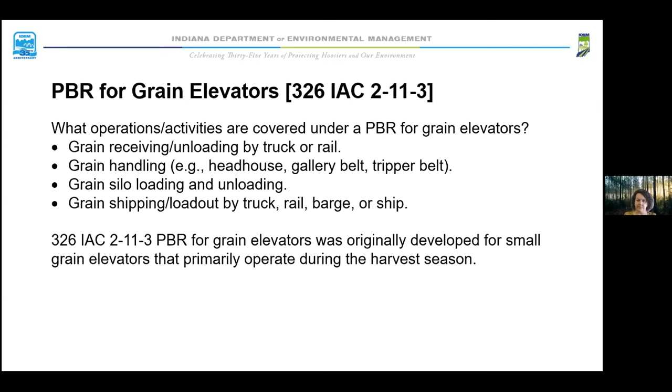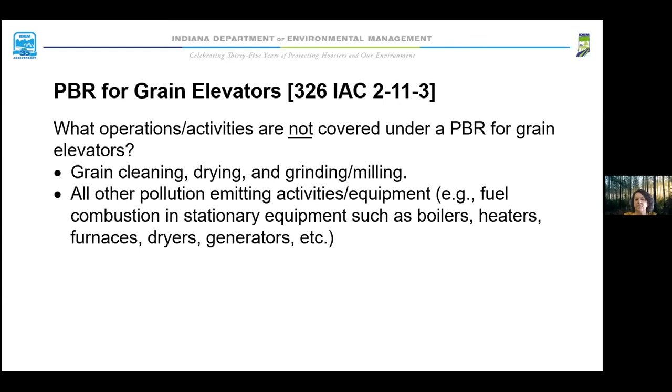What operations are not covered by a permit by rule for a grain elevator? If you're doing any cleaning, drying, grinding, or milling, you can't operate under a permit by rule for a grain elevator because those aren't covered. There are other pollution emitting activities and equipment that you could have on your source that would not be covered—potentially boilers, heaters, furnaces, dryers, generators, backup generators. Those activities are not covered under a permit by rule grain elevator. So with any of these activities on your source, you would not be able to operate under a permit by rule for a grain elevator.

If you do operate under a permit by rule for a grain elevator, there are some requirements. You have to operate and maintain your equipment properly, follow generally accepted work practices, don't discharge air pollutants so as to create a public nuisance, comply with any applicable federal, state, or local requirements, and upon request of IDEM, you need to be able to provide your grain throughputs for the previous 12 months in order to demonstrate compliance.

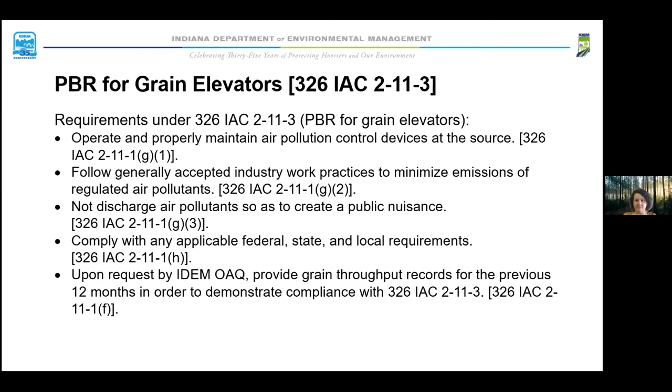Some additional things about a permit by rule grain elevator: new sources are not required to obtain a construction permit prior to operating. So if you decide that you want to build a grain elevator that will comply with the permit by rule for grain elevators, you just do it. You actually don't need authorization or an operating sheet from us in order to operate your permit by rule grain elevator.

But we do recommend that you go ahead and submit an application and get that sheet. It's going to give you the confidence and comfort that we do agree with you, and if an inspector stops by, you'll be able to say, here it is, we did apply, we do have it, and the air permitting branch has agreed with us.

With a permit by rule grain elevator operating source, you can add, modify, or replace equipment or operations without informing us, provided that the grain elevator still qualifies for a 326 IAC 2-11-3 permit by rule, or it would still be a simple grain elevator.

It does not have to be renewed, and there are no operating fees to operate under a 326 IAC 2-11-3 permit by rule for a grain elevator.

If you don't feel that you can comply with those constraints, there are some additional options. There's a general permit by rule, as we mentioned earlier, a registration, a SSOA for grain elevators, MSOP, FESOP, and Title V options.

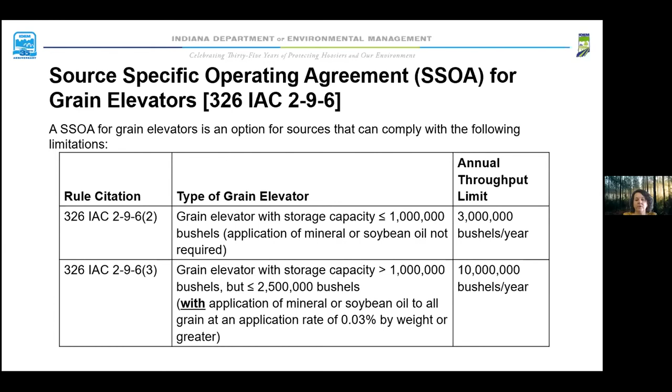Okay, so now we're at our SSOA for a grain elevator, and that can be found in the regulations at 326 IAC 2-9-6. There are two options under this SSOA. The first option is a grain elevator with storage capacity less than 1 million bushels, where you do not apply mineral or soybean oil, with an annual throughput limit of 3 million bushels a year. The second option is a grain elevator with storage capacity greater than 1 million bushels but less than 2.5 million bushels. You do need to apply mineral or soybean oil to grain at an application rate of 0.03% by weight or greater.

Your annual throughput limit is 10 million bushels a year. Again, it's not very clear in our rules what is covered, but we can go back and look historically at the rulemaking itself to determine what would be covered under a SSOA for grain elevators. The operations and activities are a little broader than what you'll find under the permit by rule for a grain elevator. So you'll have grain receiving, unloading, grain handling, grain storage, grain cleaning, also grain drying, and grain loading ship out.

For grain drying, though, please note that the only thing that's covered are the particulate emissions associated with moving the grain into the dryer. The actual emissions from fuel combustion are not covered under the SSOA, but we'll come around here in a minute and talk about how we can cover those.

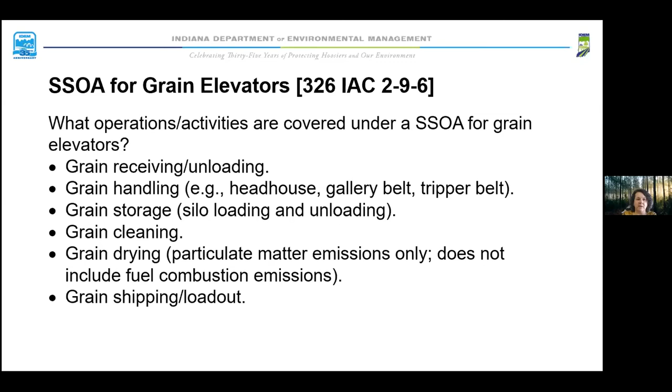So a source can apply for up to 4 different types of SSOAs, provided that the source-wide total allowable emissions, or PTE, of each regulated pollutant doesn't exceed the major source thresholds for Part 70 when aggregated. Typically, that's 100 tons per year over a 12 consecutive month period. Additional SSOAs can be required for additional units at your source.

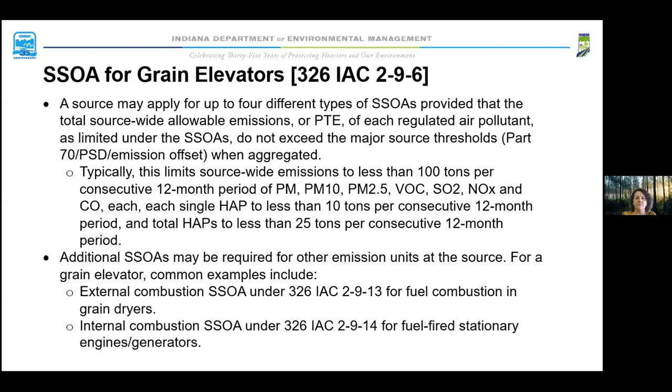Going back to that fuel combustion that is not covered under the grain elevator, you can get an external combustion SSOA, and that would cover the emissions from your fuel combustion. If you have internal combustion, stationary backup generators, those could be handled and covered under an internal combustion SSOA. So we would issue one SSOA with 3 sub-SSOAs within it.

What additional information or emission units can be included in your SSOA? Miscellaneous small equipment with combined PTE under the exemption thresholds can also be included in a SSOA. You can find those exemption levels at 326 IAC 2-1.1-3(e)(1). The exemption thresholds include 5 tons a year of PM, PM10, or PM2.5, 10 tons a year of SO2, NOx, VOC, and 25 tons a year of CO, and then a ton a year for a single HAP or 2.5 tons for a combination of HAPs.

Some examples of items that fall under this exemption: small combustion units, small boilers, small heaters, small furnaces, and small stationary generators and emergency generators can be tucked under this exempt level as part of your grain elevator SSOA.

The requirements to operate under a SSOA: maintain records of the type and amount of grain received and shipped on an annual basis. If you do opt for the second option, which requires mineral or soybean oil application, you'll need to maintain records of which type of oil is used, the application rate, and show your purchase orders. You will have an annual notification stating that your source is still in operation and in compliance with the SSOA terms and conditions, and you will have to comply with all applicable federal, state, and local requirements.

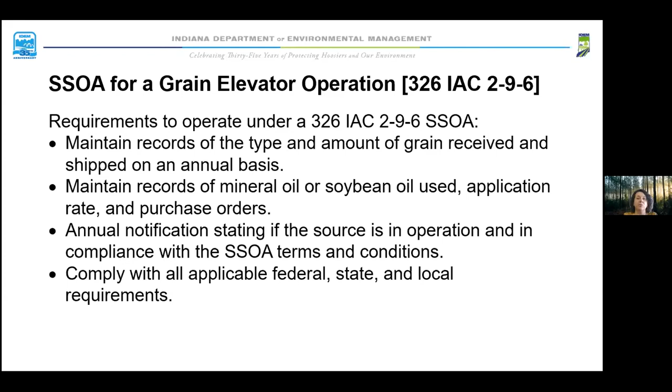So if you're a new source applying for SSOA, you will have to wait till the SSOA is issued before you commence construction. A SSOA for a grain elevator is considered an NSR SSOA, so a 30-day public notice period is required. So after putting the application together, it would have to go on public notice for 30 days, and at the end of the 30 days, we would then be able to issue it to you.

You can add, modify, or replace equipment associated with your grain elevator under the SSOA, provided that you still comply with what you are allowed to have on that CSOA. And you do not need an administrative amendment to add, modify, or replace exempt units.

There are some permitting fees associated with a SSOA, and they are $5,556 for the NSR SSOA, which is a grain elevator. If you have an NSPS or NESHAP review, and that review determines that an NSPS or NESHAP is applicable to your source, there is a $793 fee. NSPS and NESHAPs are what we call our federal rules.

You may have NSPS DD. That would be an applicable NSPS. NESHAPs typically go along with your generators. There's 4I, 4J, and under the NESHAPs 4Z. If any of those are applicable to your source, there would be a fee for that. And a SSOA does not require a renewal.

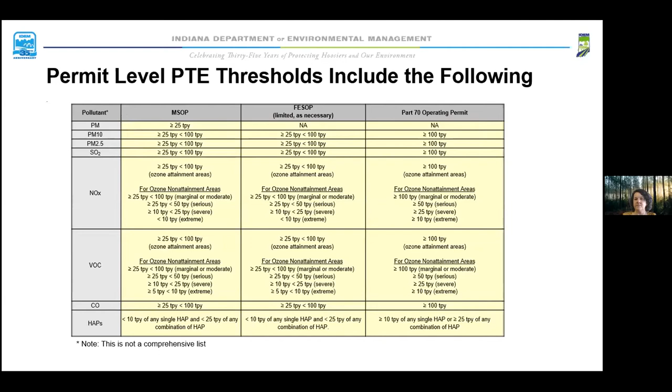The permit level thresholds for an MSOP, FESOP, and Title V are in this table. Note at the bottom it says this is not a comprehensive list of the pollutants. The additional pollutants tend to be things like hydrogen sulfide, lead, pollutants that really aren't going to affect you. We've included this table just for reference, but we are going to go down and talk about some of the limitations in a few slides.

So the first thing you would need to do if you want to look at one of these options is calculate your source-wide potential to emit. EPA has some guidance out there. It's been out for several decades.

For grain handling operations at a country grain elevator that primarily operates during the harvest season and receives 50% of its grain from farmers in the immediate vicinity during the harvest season, you can determine your PTE by looking at your past 5 years of grain throughput, multiplying it by 1.2, and using those as your throughputs to calculate what your potential to emit is.

I know we have a few consultants in the audience, so I want to point out we typically do use AP42, and it is a factor that you multiply the grain throughput by the number of trips through your headhouse. We typically look at moving from unloading into a silo as 1 trip. If you have cleaning and grain drying, you're going to have 2 or 3 trips total.

Note that the PTE from fuel combustion at your grain dryer is not based on your actual past usage. It is based on max rated capacity, 24 hours a day, 365 days a year. I do realize that's not feasible really for anybody, but that is the federal rules, it is our state rules, and that is how the PTE would have to be calculated.

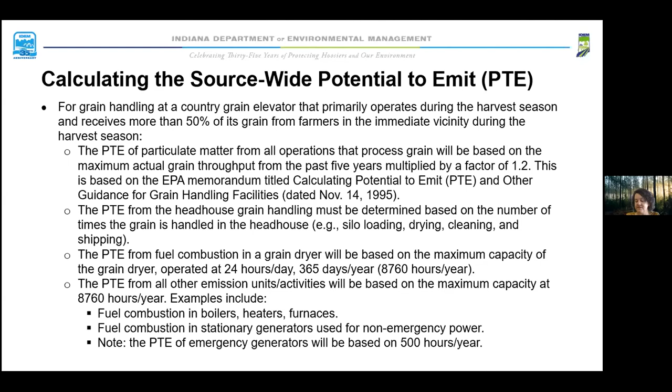So if you're not a country grain elevator and you don't have more than 50% coming from off your location, that would be all other grain elevators and grain terminals. You're going to have to calculate the potential to emit of all your emission units based on a max rated capacity at 8760 hours a year.

Process bottlenecks can be taken into account when determining your PTE, although you do need to let us know what the individual max ratings are and where the bottleneck is so we can make that clear in the calculations of permits. Again, the PTE is not based on past actuals or actual hours of operation for these types of facilities. Again, AP42 emission factors are typically used.

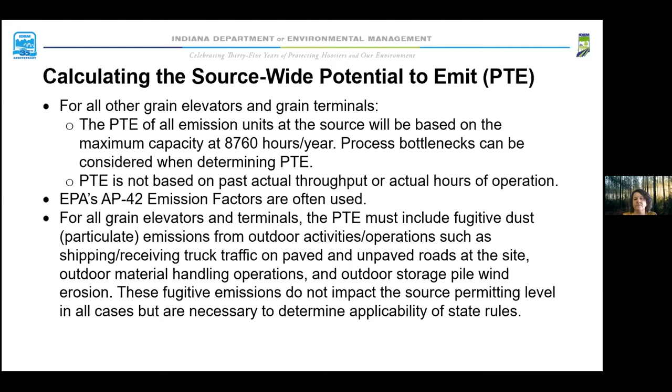For grain elevators and terminals, the PTE from fugitive dust must be included, and some of those activities would be truck traffic on your paved or unpaved roads, outdoor material handling, storage piles. They may not impact your permit level, but they are always necessary to determine state rule applicability.

So, other permitting approvals after you've determined your PTE: an MSOP, minor source operating permit, and this is the one we're going to focus a little bit more on. Your unrestricted, which is your unlimited, uncontrolled PTE, is below the Part 70 major source threshold. Again, typically that's 100 tons a year.

It generally has less record keeping than a Part 70 or FESOP. It does require a 30-day public notice and comment period. There's an annual $200 fee, and annual notification stating whether the source is in operation and in compliance with the terms and conditions in the permit. So that's at a minimum, that's going to be your record keeping.

If your uncontrolled unlimited is above 100, you're considered a Part 70 source. Again, that's a 30-day public notice period and then a 45-day EPA review period.

Annual fees are $2,381 as a base fee plus an additional $52.38 for each ton of actual pollutants during the year. And you will have annual compliance certification that addresses the source's compliance status with permit terms and conditions.

If you're above 100 tons per year without limitations, there is an option to be a FESOP instead of a Part 70 operating permit, and that would require that you take limits to keep your actual emissions below 100.

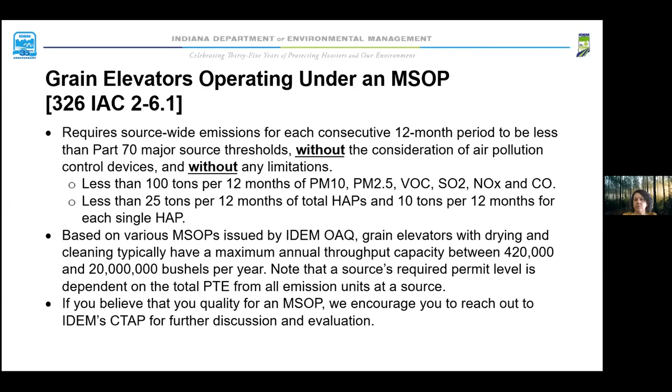Based on the various MSOPs that we have issued with drying and cleaning, we've seen a maximum annual throughput capacity between 420,000 bushels and 20 million bushels. So that kind of gives you a range of your throughput capacities that would qualify for an MSOP. Note that the source's required permit level is dependent on all the emission units at your source, so 420,000 might not work for you and 20 million may not work for you either, but somewhere in that range. If you believe you qualify for an MSOP, reach out to IDEM's CTAP or reach out directly to my office and we will help work with you on that.

So if you do get an MSOP, what are the typical parts of an MSOP for a grain elevator permit? You're going to have Section A, and that's a source summary. That's going to talk about who you are, where you are, your name, your location, what's your county attainment status. It's also going to list all the emission units located at your source.

Section B are general conditions applicable to all MSOPs. This is going to tell you when you need to apply for a renewal, kind of general information like that. Section C is source operating conditions. It may contain your fugitive dust emission requirements—don't allow dust to go over the fence line. So those are operational conditions that you're going to find in Section C.

Section D is emission unit operation conditions, and it's the requirements under our rules that are specific to the emission units at your source. Section E is federal requirements, and the last section are your reporting forms.

So I want to focus more on Section D, which are your potential emission unit operation conditions, and it's broken down into subsections. The first one is going to be emission limitations and standards. All grain elevators will most likely have a particulate limitation in them. The most common is 326 IAC 6-3-2, and this is a process weight calculation. We simply use your process weight, one of two equations that are in the rule, and we come up with the pound per hour, and that is your limitation.

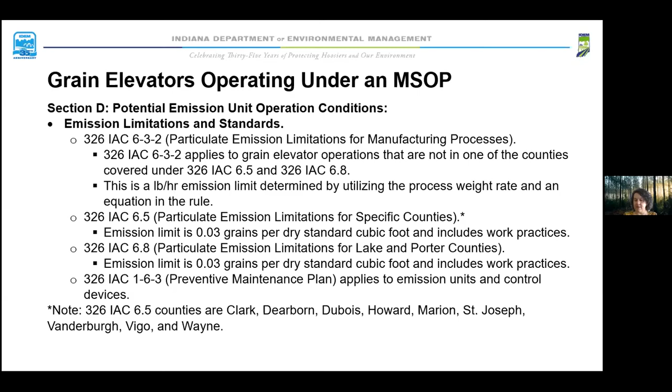There's some additional subsections under Section D. The next one would be your compliance determination requirements. In this section, we would require that you operate your control devices if necessary to comply with the Article 6 limit. There may be stack testing that's not very frequent in an MSOP, but it can happen.

The next subsection would be compliance monitoring requirements. If you have a bag house, you have an option to keep a daily pressure drop record or to do a daily VE. Semi-annual inspections are required for control devices that vent indoors. You may have inspection requirements for baffles, sock sleeves, and spouts. And if you do have a bag house or filter, you're going to have a requirement that tells you how to handle a broken, failed bag detection or filter detection and the timing for your repair.

The last subsection in a D section is going to be record keeping and reporting. If you are doing daily pressure drop or VEs, you're going to be required to keep a record of those results. If you have to do semi-annual inspections, you'll be required to keep a record of those results and the date.

Please note that in the D section, these are state requirements only. Again, we've talked earlier about federal rules, NSPSs and NESHAPs. Those requirements will not be in the D section of your permit. They're going to be in the next section, the E section.

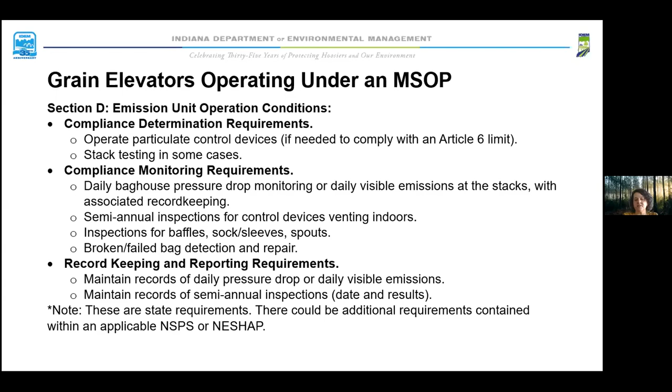So your E section will contain your federal rule requirements. And the way that we incorporate those is we simply put the citations that are applicable from the NSPS or NESHAP, and then we attach the entire NSPS or NESHAP to the end of your permit.

Some of the federal rules that are typical at a grain elevator can include NSPS subpart Dc for boilers greater than 10 MMBTU, NSPS subpart DD for grain elevators. Those have opacity, grain loading limits, and some testing requirements in them. NSPS subpart IIII for stationary diesel engine generators, NSPS JJJJ for stationary gasoline engines and generators. NSPS ZZZZ or NESHAP ZZZZ, that's going to apply to all stationary engines and generators regardless of the fuel type.

NESHAP JJJJJJ is for boilers at area sources that are not gas-fired, so natural gas-fired units are exempt from JJJJJJ. This would apply if you had fuel oil. There's also NESHAP CCCCCC, for gasoline dispensing at area HAP sources, which you would be if you're an MSOP; otherwise you wouldn't qualify. This is simply if you have a gas dispensing facility on site. And just for reference, NESHAP DDDDDDD is if you're prepared feeds manufacturing and you use chromium and or manganese.

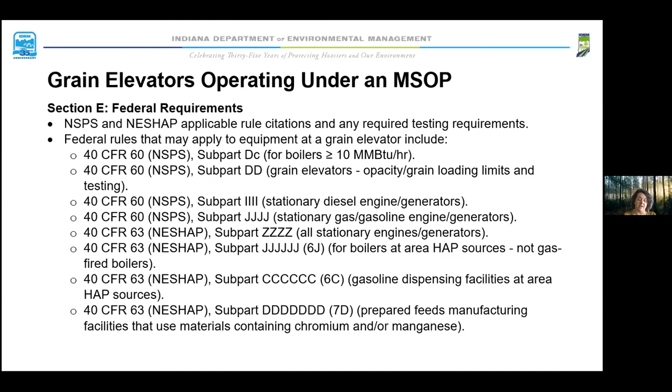The last section of your MSOP is going to be your reporting requirements. Everybody will have an annual notification. You need to submit it no later than March 1st, and it will simply state that you're in operation in compliance with all permit terms and conditions, or you're not.

There is also a malfunction report required for any malfunctions that last more than one hour. Again, keeping in mind these reporting requirements are state only, you could have additional reporting requirements contained within one of your applicable NSPSs or NESHAPs.

I want to conclude this by talking about some emissions that aren't included in your permit because they're not considered part of your source.

Mobile sources, we typically call these tailpipe emissions - cars, trucks, buses that may be on your site. The tailpipe emissions are not included; they're not considered part of your source. However, fugitive dust kicked up by these sources can be included in your permit and is considered part of your source.

The other one is non-road engines, and we tell you where the definition of it is. A non-road engine is an engine typically that in and of itself is designed to be portable and it's certified as a non-road engine. It's something you bring on your site and keep in one location for less than 12 months. You may need a backup generator temporarily. If you bring in a backup generator designed to be portable, used for a few months or weeks and then removed, that is considered a non-road engine and it is not permittable under the Clean Air Act, so we don't look at those.

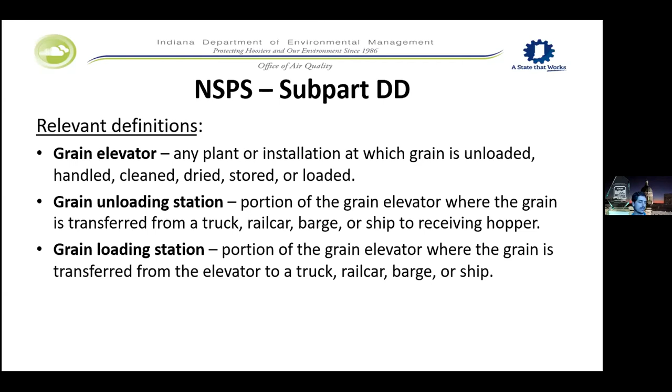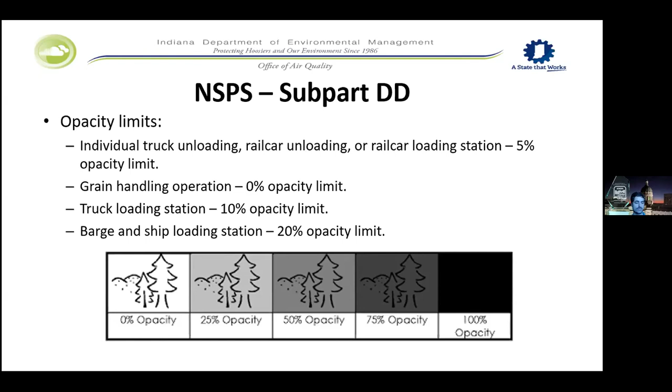The federal regulation also deals with performance testing. So if you fall under the federal regulation, subpart DD, you are required to do an initial one-time performance testing of your equipment. This needs to be done within 60 days of reaching maximum production rate, or before 180 days after your initial start of the facility.

So an inspector actually deals with method 9s from our smoke school training, which we use to look at dust coming off certain sites, like dust coming off your roads, to see what the opacity would be from that.

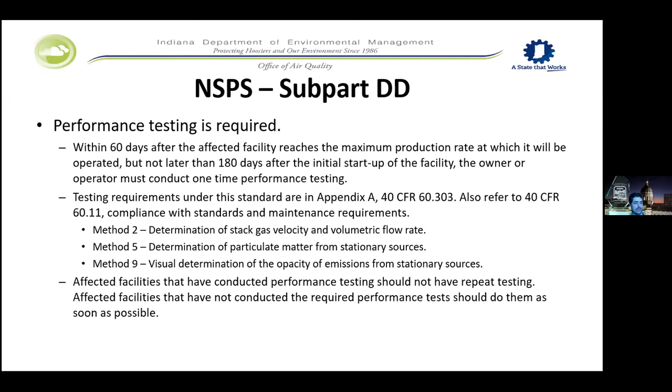All facilities must conduct performance testing, but the federal rule at least does not require repeat testing. If you haven't completed any testing yet, that should be done as soon as possible. And that covers the federal rule.

So now we're going to go into the compliance inspection. Air compliance inspections are almost always conducted unannounced. Now with COVID-19 and everything going on, we have moved to having announced inspections for health and safety reasons. But once this pandemic is over, we will almost certainly be going back to unannounced inspections.

Now these inspections are routine. They're always conducted during your operating season because we need to see at least 50% of your equipment running for the EPA to accept our inspection results. These inspections usually occur somewhere between 5 to 10 years. They can be done more often, but for lower level permits like SSOAs and permit by rules, it's usually less frequent.

Before we go on site, we always conduct surveillance. This will involve driving in the area around the property to see if your equipment is running or if there's any dust leaving your property, which would be considered fugitive dust. We also conduct, other than our routine inspections, complaint inspections as well.

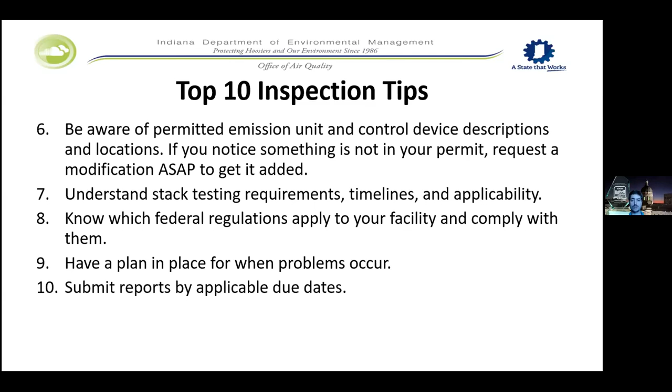If you have testing required, always make sure you understand how often your testing is required and what pieces of equipment need to be tested. Always have a plan for when problems occur, because they almost always do, and make sure you submit any reports that you need to by their due dates.

So the next point I'm going to move to is citizen complaints and fugitive dust. For grain elevators, the main complaint we receive is for fugitive dust. Fugitive dust is when you have particulate matter or dust leaving your boundary lines at ground level, usually onto an adjacent property. I've received quite a few complaints before about the grain elevator working, dust leaving the property, and interacting with nearby houses. That's an example of a fugitive dust complaint.

So once we actually receive complaints, what we do is gather as much information as we can from the complainant. Then we'll look through our records to see if this is the first time someone's complained or if this is an ongoing issue over the years.

After we do this prep work, we then go and conduct surveillance of the property, usually multiple times, especially with how weather changes. If it's raining one day and it's supposed to be dry a little bit later, we'll go in between these times to see what a normal day would be, if the amount of dust increases or decreases, or if it's actually leaving the property line.

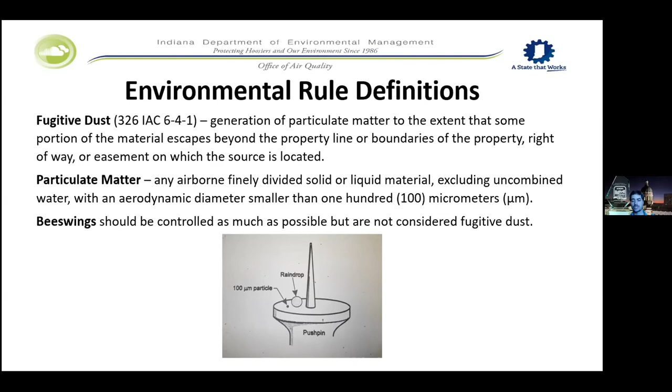Here are some ways you can control dust to make sure it's not getting out of hand or leaving the property. One way is, at your facility where materials are being transferred, minimize the distance between transfer points. The more air time or open air that grain and soybeans are exposed to, the easier it is for a dust cloud to kick up or for the wind to catch it and move it around.

Another thing I've seen mainly used to help control visible emissions or dust is using water or some sort of dust suppressant to keep everything down, especially in the drier months.

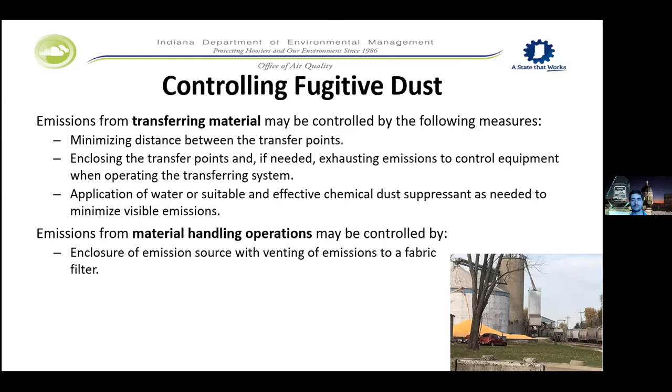For your unloading operations, you can control them by either enclosing the whole operation area, or reducing that free fall distance. If you have an open truck, make sure you have 3 feet of free fall distance—that's a lot different than 10 feet of free fall distance for keeping dust down.

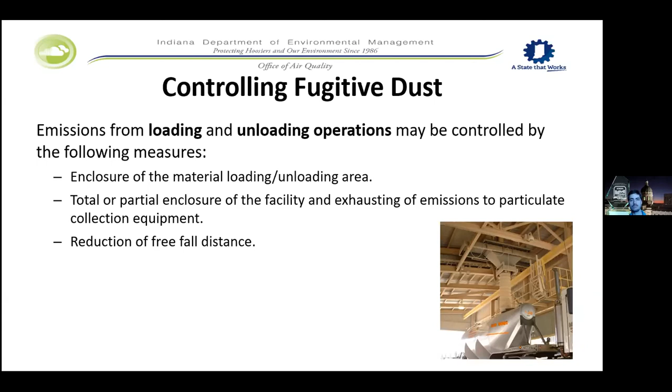The main place we see dust come from is roads—unpaved roads and parking lots. The main thing you can do is pave it if possible, or if that's not feasible, use water and a dust suppressant approved by our organization to keep dust down.

The main thing to remember is not to overwater or use too much dust suppressant on the road, because once you start tracking mud onto the road that's not on your property, that is also considered fugitive dust. So you have to find a good balance between keeping dust down and not tracking mud onto the road. I've seen wheel washes used to prevent tracking as trucks or semis leave the property.

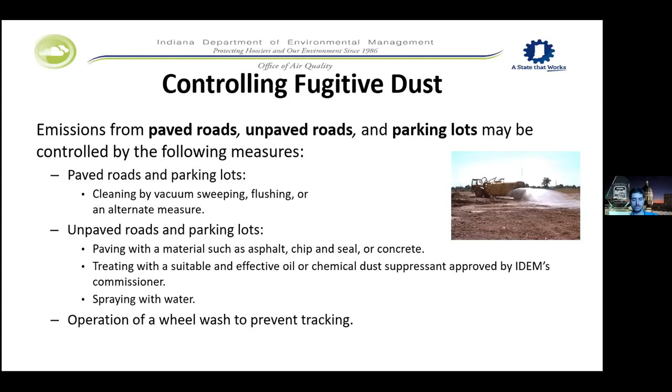And that actually covers most of our dust issues and compliance.

Thank you, Daniel. We did have a few questions come in—this one there might be a few more for Jenny. This one is from Randy Hoffman: if a source is operating under the PBR rule under 2-11 for grain elevators and has a dryer on site with PTE below the registration thresholds, can they still operate under PBR?